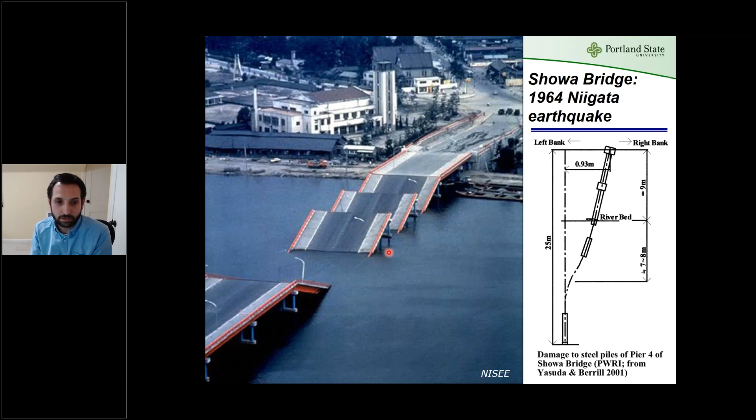To start with, there are many case histories documenting collapse of piles due to lateral spreading. You're all familiar with this example of the Showa Bridge that collapsed in the 1964 Niigata earthquake, where excessive deformations in piles due to liquefaction-induced lateral spreading resulted in the collapse of the bridge. Here's another example from the Port of Oakland that suffered a lot of damage in the 1989 Loma Prieta earthquake, with examples of shear failures at the top of the piles. There are many case histories that have documented this.

And there are cases where the piles were actually designed to sustain those loads. This is one example documented by Professor Finn from the 1983 earthquake in Japan, where the approach embankment failed due to lateral spreading induced by liquefaction, but the piles themselves did not fail, and they were designed to take the loads based on the inertial load from the earthquake shaking and the lateral spreading loads from ground deformations separately.

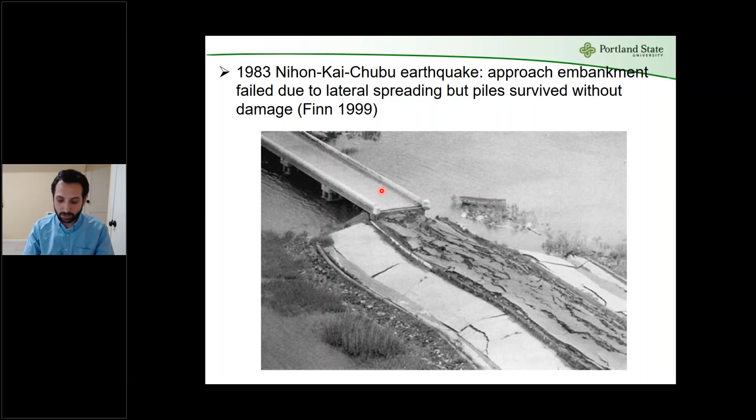Which takes us to the question we are trying to address in this study: should inertial load and the lateral ground deformations be additive in design? Are they in phase or out of phase?

You're all familiar with this drawing from Brandenberg et al., where you have piles going through what we call a multi-layer liquefiable soil, a non-liquefiable crust sitting on liquefiable soil, and at the bottom a competent soil that does not liquefy. So when it's sitting on a gently sloped ground, that top non-liquefiable crust slides down and exerts a huge load on the piles. So the load from the lateral spreading is in this case downslope, and the inertial load from the mass and acceleration on the deck mass is also downslope.

So we want to see, using these 5 centrifuge tests that I mentioned, if that is the same response we observe in those tests. Are these two loads in phase or are they out of phase? The other thing we want to discuss is how to design for them.

A lot of you know we've experienced this type of analysis, where sometimes you apply the lateral spreading demands as a displacement to the end node of PY springs. LPILE has made it very easy - you just apply it as a soil displacement. Sometimes you apply it as a limit earth pressure. So we want to see if that is applicable in our case, and you'll see in the tests we analyzed, this ended up being overly conservative, and I'll show you why in a few slides.

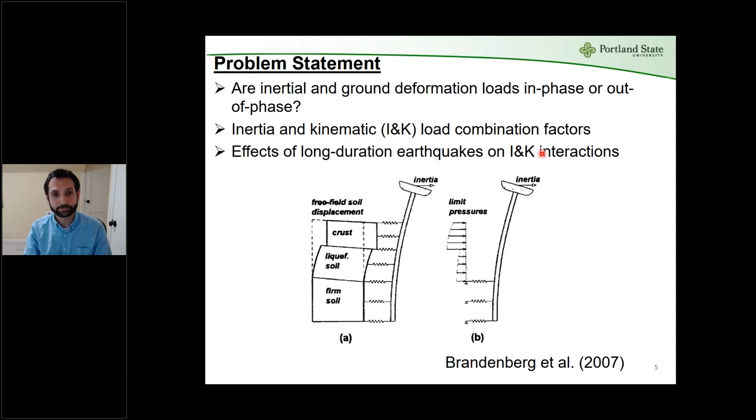I've listed here some of the design codes we were able to compile, specifically on the combination factors for inertia and kinematic loads. There are tons of research studies that have investigated this, which I'm not listing here. I'm only listing the design codes and standards to see what they say on liquefaction and on inertia and kinematic interactions.

ASCE 61-14, the code for ports and wharves, and the Port of Long Beach Wharf Design Criteria 2015 study, mention that the two loads, inertia and kinematic, do not need to be superimposed. They say the maximum moments occur at different times and the two loads should be treated uncoupled for marginal wharves. The Port of Anchorage seismic design manual recommends combining peak inertia with 100% of peak kinematic.

They allow using smaller factors if you use 2D nonlinear dynamic analysis, but no less than 25%. AASHTO 2014 still treats the two loads as uncoupled, and only says that the simultaneous effect of inertia and lateral spreading loads should be considered only for large magnitude earthquakes, for a reason we all know: longer durations. The MCEER ATC 2003 study is one of the earlier studies that really addressed this issue.

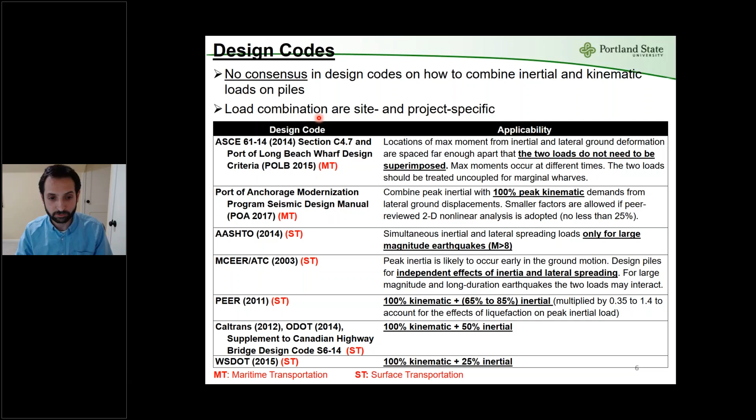We used 5 centrifuge tests performed by Scott Schlechter, Nathan McCullough, and Steve Dickenson when they were at Oregon State University. The tests were performed at the centrifuge facility at UC Davis. Here is a figure of one of these tests. Right here you see the deck supported by 3 by 7 rows of piles.

Here is a cross section of one of these centrifuge tests, which were instrumented with strain gauges along the piles, accelerometers at the wharf deck which we use to see when the maximum inertia occurs, displacement transducers that measure displacement on the deck and soil, and pore water pressure transducers that tell us when liquefaction occurs, as well as accelerometers embedded in soil, which we use to back-calculate the soil displacements.

To give you an idea of the general geometry: we have dense sand on top, two rock fills, a dense sand layer on top, about 16 meters of liquefiable soil, and underneath another dense sand layer. There are 7 piles, and as you can see in this photo, arranged in 3 rows. The pile diameters range from 0.4 to 0.6 meters.

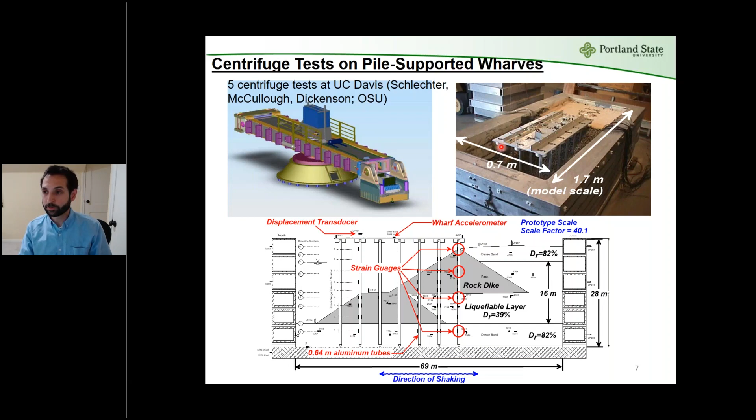So these are layouts of the other centrifuge tests. They all have a 3 by 7 pile group, with diameters of 0.4 to 0.6 meters, designed to be representative of concrete piles in prototype scale.

This is one of the tests I showed you earlier. There are 3 tests that are kind of similar: NJM01, this one NJM02, and this one to the right, SMS01. They all have a rockfill, 2 rockfills, with loose sand in the middle.

In some of these tests, an effect of ground improvement was investigated. In this middle left figure, you see a bay mud. This was supposed to investigate the subsurface conditions at the port of Oakland. Then in the SMS01 middle right, there is a CDSM, a cement deep soil mixing, used as an improvement for bay mud. Interestingly, this CDSM unit was not keyed into the underlying dense sand layer, and a failure surface developed right underneath this CDSM unit, which resulted in huge bending moments on these piles.

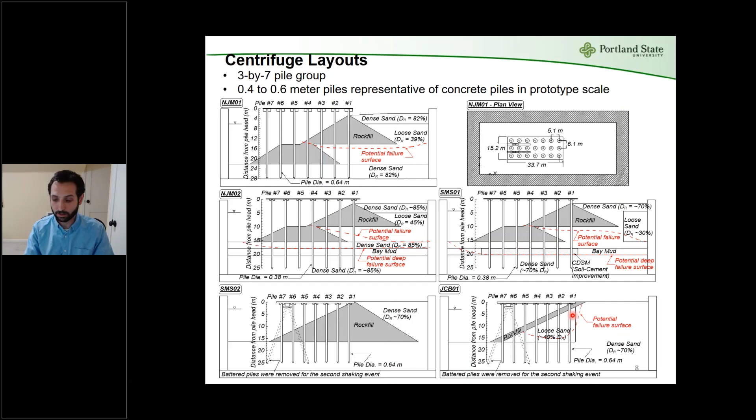Here I have an animation that shows one of these centrifuge tests, and this is not a simulation—these are all recorded data from the centrifuge test. At the bottom you see the ground motion.

This is Loma Prieta scaled to 0.15 G. You see the deck displacement moving, so that's the acceleration of the deck multiplied by the mass of the deck, which is the source of the inertial load.

You see these pink lines showing how the soil displacement is moving, back calculated from the accelerometers embedded here. You can visually see how the soil moves and the deck moves, and how they interact, whether they are in phase or out of phase during the motion.

On the right side, you see the pore pressure ratios, and right here is 100%. So right in this loose sand layer, we will see that it liquefied. Closer to the piles, it didn't really reach 100% pore pressure ratio, which I'll show you a little later.

I'm going to go to the next slide, but if you want at the end of the presentation, I can play this animation one more time.

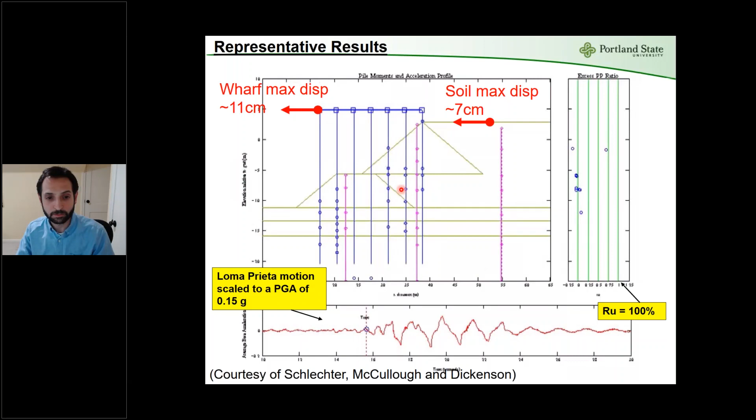Let me see if I can get that pointer. I'm trying to get the pointer to work.

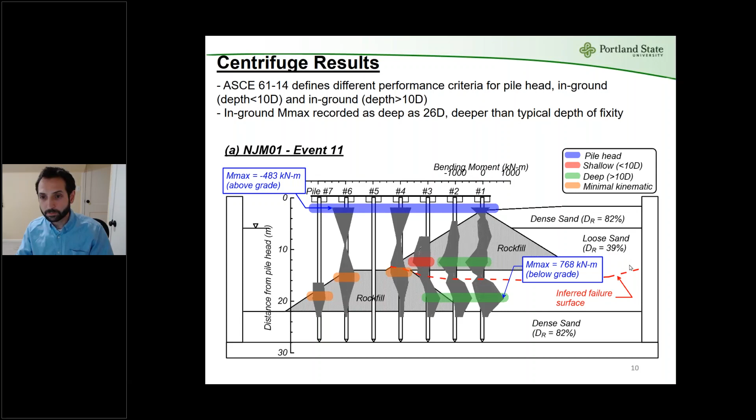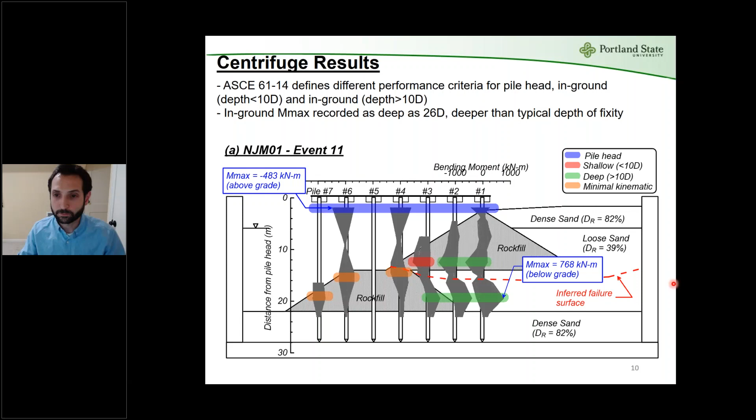So there are bending moments, shown with that blue hatched area, that develop at top of the piles. Then there are bending moments that developed deep in the soil, as deep as 26 diameters deep, which is way deeper than the typical depth of fixity. And there are places where the moment developed below grade but shallow.

So we bin these into the pile head moments, the deep moments deeper than 10 diameters, and shallow moments shallower than 10 diameter depth. This is basically compatible with what ASCE 61 uses to define different performance criteria for pile head moments, in-ground moments shallower than 10 diameter, and in-ground moments deeper than 10 diameter.

As you look at this example here, you see that the moment at top of the pile was 483 kilonewton meters. At depth, it was 768. So this is one example where the moments deep into the ground, which usually developed at the top and bottom of that liquefiable layer, were actually larger than the moments that developed at top of the pile.

So we tried to do this for all 5 centrifuge tests and understand where the moments develop—are they usually larger at top of the pile and smaller in-ground, or vice versa?

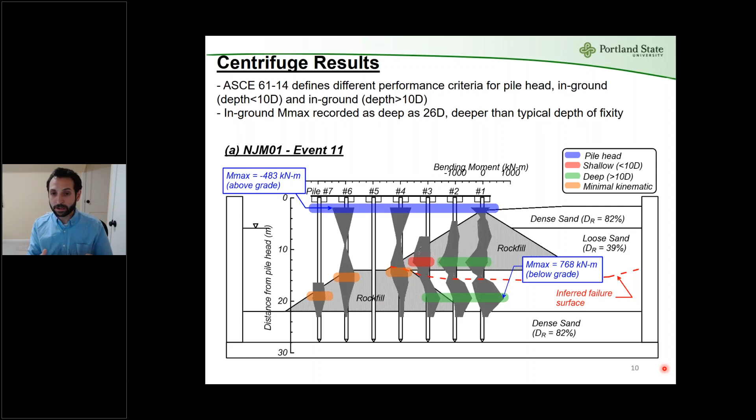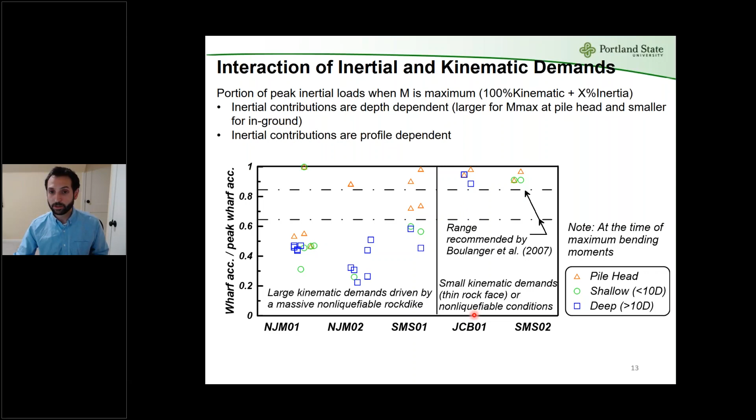So we looked at these two and tried to bin them into two classes of profiles. In one, we have a large kinematic demand driven by a massive non-liquefiable rockdike. In another, you have small kinematic demands induced by a thin rock face or a non-liquefied condition. In these cases, your combination factors are higher. Based on this analysis, these are our proposed load combination factors.

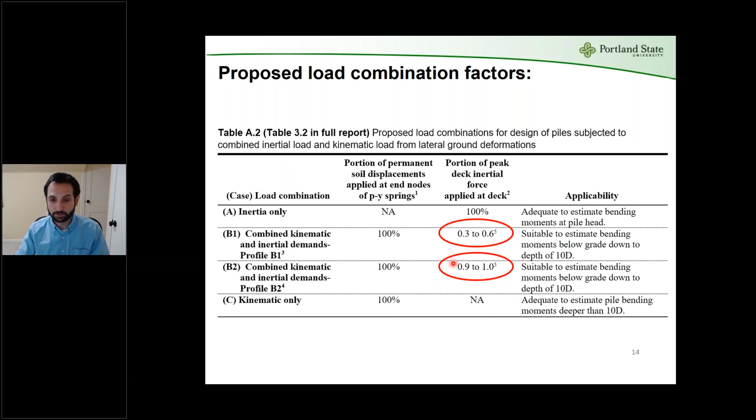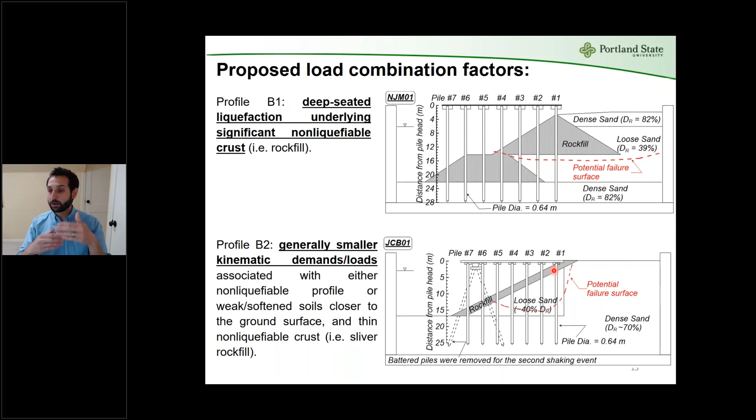Profile B2 is when you have generally smaller kinematic demands or loads associated with either a non-liquefiable profile or weak or softened soil closer to the ground surface, basically a loose sand layer and a thin rock fill. In these cases, the kinematic loads are smaller, but the contribution of inertia and kinematic is larger.

So with that, we said, how do we do the design in an equivalent static analysis using a PY approach? In order to do that analysis, we need to estimate inertial demand and kinematic demand. But before doing that, we wanted to see how accurate a PY approach is in estimating demands, specifically bending moments in the piles. And we all know the limitations with the PY approach.

The PY springs do not capture the dynamic behavior of soil structure interaction. There are issues with the way that they model loading and unloading, and the development of the gap. There are issues with the way the original PY springs have been developed for small diameter piles, so can we apply them to large diameters or not? That's also a question.

I want to show you an example of where we wanted to see what our baseline is for estimating the bending moments using a PY approach. In this case, we used LPILE. We got the deck accelerations from the centrifuge and the soil displacements from the centrifuge, and we applied them in LPILE, so there's no uncertainty associated with how to estimate these two demands.

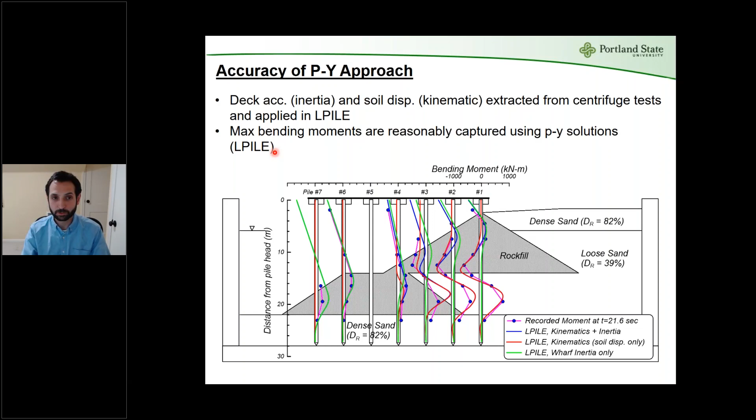So now we're going to discuss how to get these two main components, the kinematic demand and the inertia demand. There are several design questions that I'm going to go through as I discuss this section.

First of all, how do we apply kinematic demands? Displacement based versus limit soil pressure. This is the same figure that I showed you earlier. One approach is when you get the soil displacement and apply them to the end node of PY springs, and then look at the demands in the piles. The second approach is to remove all the PY springs and apply a limit or ultimate soil pressure on the piles and estimate the demands.

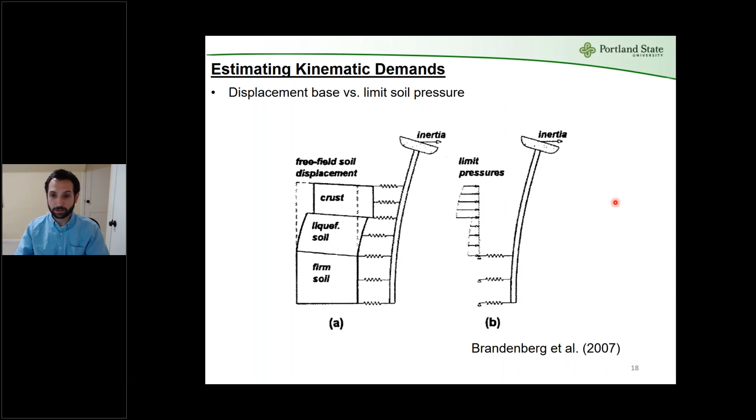We found that this ends up being overly conservative in our case, and I'll show you why. These are the soil reactions back calculated from one of the centrifuge tests in two events, so the results are fairly consistent. At the time when inertia is pushing downslope, inertia is pushing to the left, but when you look at the soil resistance or soil reaction, it's actually resisting in almost the top half of the rockfill.

And it's pushing down in the lower half of the rockfill. So it's nowhere near a uniformly downslope earth pressure or soil pressure that you would use with the limit soil approach. If you apply a uniformly downslope soil pressure instead, you're going to overestimate demands by a huge amount.

This is a case when you have small diameter flexible piles, because flexible piles tend to follow soil deformations. This conclusion may not be the case when you're dealing with large diameter piles, and we can get into that if needed.

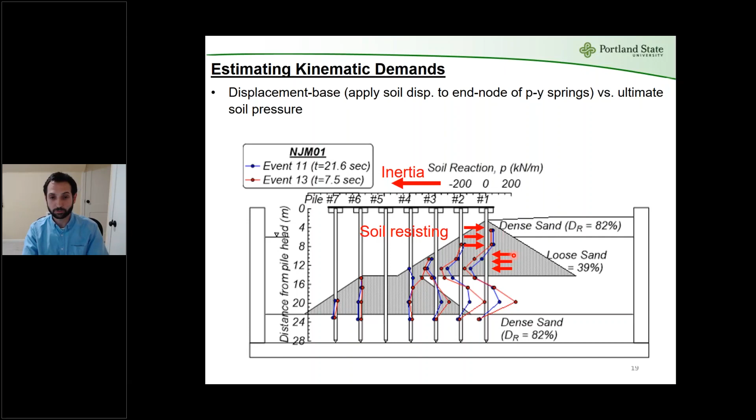Here I'm showing you why that soil reaction is the way I showed you earlier. On the left, these are back calculated soil displacements and pile displacements from centrifuge tests, so they're not simulation or L-pile analysis, they're back calculated from the tests themselves. Red shows how the soil moves, blue shows how the pile moves, and as you see there are locations where the pile moves more than the soil, which is why the soil reaction pushes up in a positive direction, and there are areas where the soil moves more than the pile, which is why the soil reaction is moving downslope in the negative direction.

Now here I have this red line which shows the ultimate soil reaction. If you take the P ultimates of the PY springs from API and plot it here, you can see that the soil reactions we back calculated from the centrifuge are just way smaller than the P ultimates you would estimate from PY curves, from API curves.

This figure to the right is the same figure with just different scales, so you can see the P ultimate from the API curves if you choose to use the ultimate soil pressure and apply it as a kinematic force. You would overestimate the demands by a significant amount if you use the red curve as opposed to the displacement approach, which might give you something closer to the blue demands.

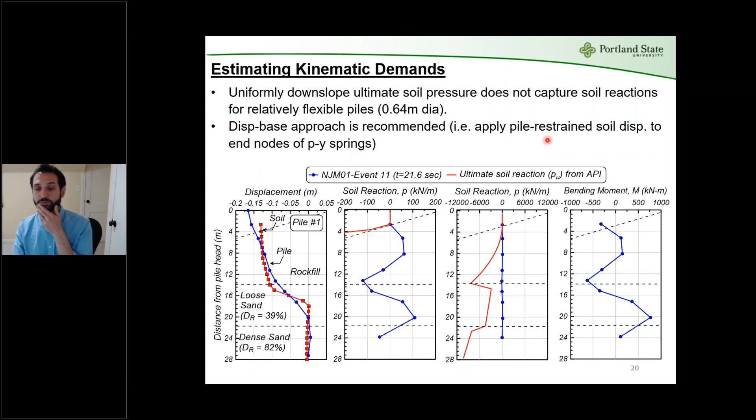So the second question, going back, our recommendation is to use a displacement-based approach and apply the pile restrained soil displacement to the end node of PY springs. Now let's focus on that pile restrained issue. Some people believe we should apply the free field displacements to the end node of PY springs. Some people believe we should apply the pile restrained soil displacements, accounting for pile pinning effects. Caltrans 2012 recommends using the pile restrained displacements, and I wanted to show you what happens if you use either of these two displacements.

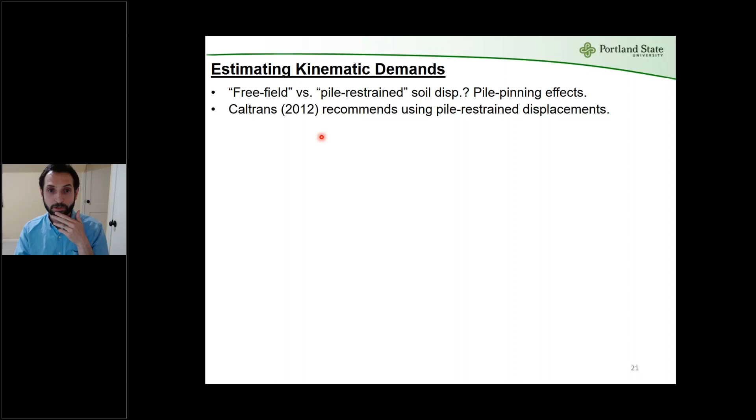I'm showing you a different project, different study, from when I worked at Fugro, just as an example to see what happens if you use either of these two loads. This is from an Amber Cove cruise ship docking facility in Dominican Republic. There's a 400 meter main pier supported on 30 bents, and a trestle here 200 meter long, supported on 17 bents. And the bents look like this, a pile group with 3 piles.

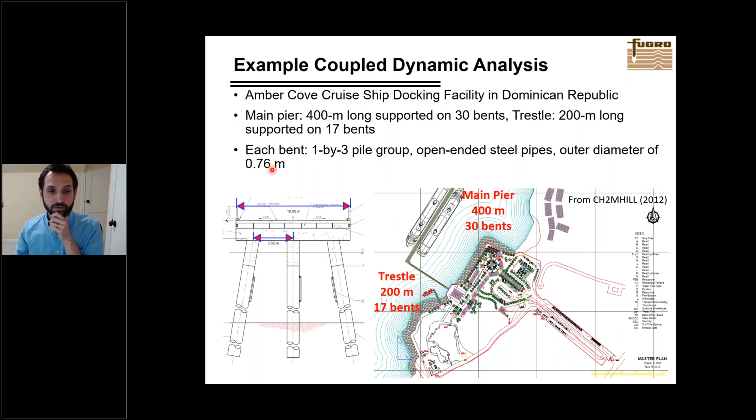Again, relatively flexible piles, 0.76 meter diameter. We performed FLAC analysis, nonlinear dynamic analysis. On top, you see soil displacements without the piles, 3.5 meters of soil slope toe displacement. At the bottom, you see the results if we add the piles, what Caltrans calls pile restrained displacements, about 0.4 meters. So 3.5 meter soil displacement free field compared to 0.4 meter pile restrained displacement.

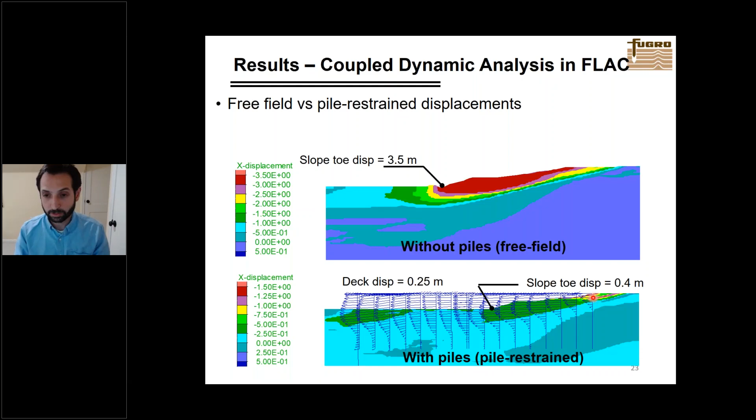Now let's see what happens if you apply them in L-pile. On the left, this is the result of a pseudostatic analysis, where you take those soil displacements and apply them in L-pile. You see the soil displacements in dashed blue line, that's the 3.5 meters I showed earlier. The pile displacements you'd estimate from that are really large, whereas in the dynamic analysis we recorded much less, less than 0.5 meter displacement at the top of the pile.

Now, if instead of free field displacements we apply the pile restrained displacements, you get something much closer to what you measure in the dynamic analysis. Red is the displacement estimated using pile restrained displacements, accounting for pile pinning effect, applied in L-pile. That gives you one point of reference, and I'm sure many of you are familiar with this difference, that free field displacements versus pile restrained displacements could be huge.

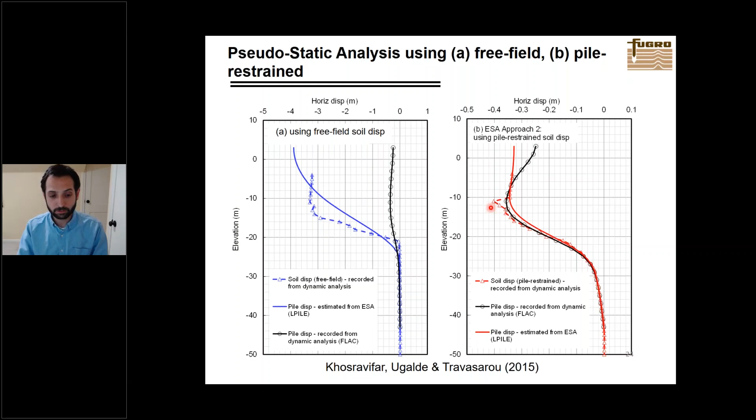The other design question, going back again, our recommendation, as you'll see later, is to use the pile restrained displacements. Now, if you're trying to estimate the displacements, how do we estimate them? We usually use Newmark block analysis. We wanted to see what displacements these Newmark block analyses really represent.

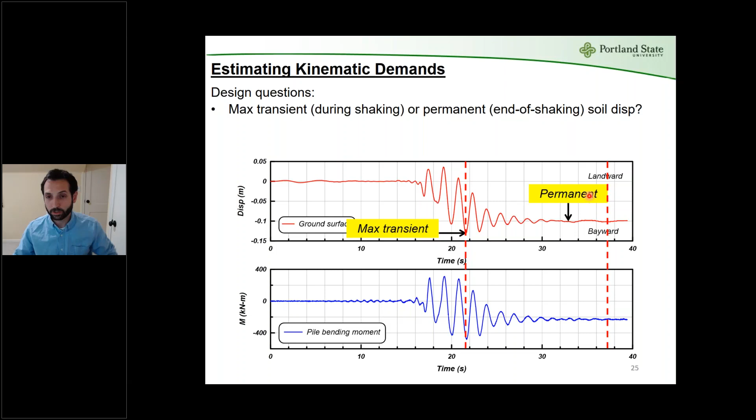For relatively flexible piles, this is very important because the bending moments are almost linearly, maybe not linearly, but very strongly proportional to the soil displacements, since they follow the soil displacement pattern. So we wanted to see, when we perform a Newmark block analysis, do we estimate this transient one or the permanent one, and by what measure of accuracy?

Here you see results from one of our master students, Thomas Torkelson, using Newmark sliding block analysis to get the pile restrained soil displacements. Caltrans recommends using the compatibility approach, where you actually perform pile pinning and get the shear forces from a lateral load analysis, in this case LPILE, and input them into your slope stability analysis, or SLOPE/W analysis. That's what we did here. If you're curious, we used residual shear strengths in liquefiable soils, compatible with the weighted approach that Steve Kramer recommends in his 2008 WSDOT report, and they worked out pretty well in estimating displacements.

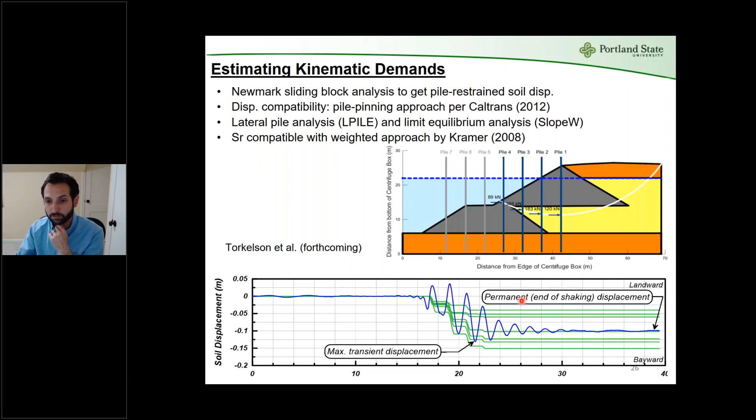In this figure at the bottom, you see the soil displacements with time. Blue is the recorded displacement from the centrifuge, and green is what we estimate using Newmark block analysis. You see there's quite a bit of variation here. So we looked at the mean or median displacements from Newmark, and median plus one standard deviation, and tried to see which one better estimates the maximum transient or permanent soil displacements.

What you see here are results from all 5 centrifuge tests and 2 shakings per test, so 10 experiments total, comparing Newmark displacements versus centrifuge displacements. On the left is the permanent end-of-shaking displacement. On the right is the maximum transient displacement. As you can see, if you're interested in permanent end-of-shaking displacements, the median displacement from Newmark analysis on average captures the permanent displacement from the centrifuge reasonably well. If you're interested in maximum transient displacement, then we have to use median plus one standard deviation, shown by these tick marks, the ranges you see in these plots.

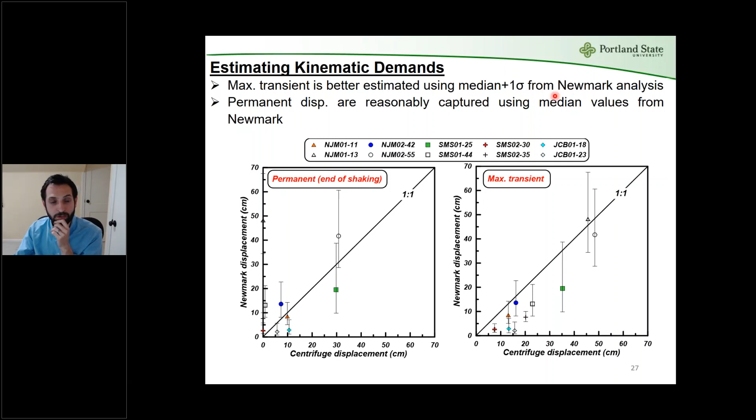Maximum transient displacement is better estimated using median plus 1 standard deviation from Newmark analysis. Permanent displacements are reasonably captured using median values from Newmark. But there's a caveat here.

If you're interested in maximum moments, we should be using maximum transient displacements. If you're interested in maximum transient displacements, our data shows that we should be using Newmark method, median plus 1 standard deviation. But when you get the soil displacement at the ground surface, you have to distribute them with depth.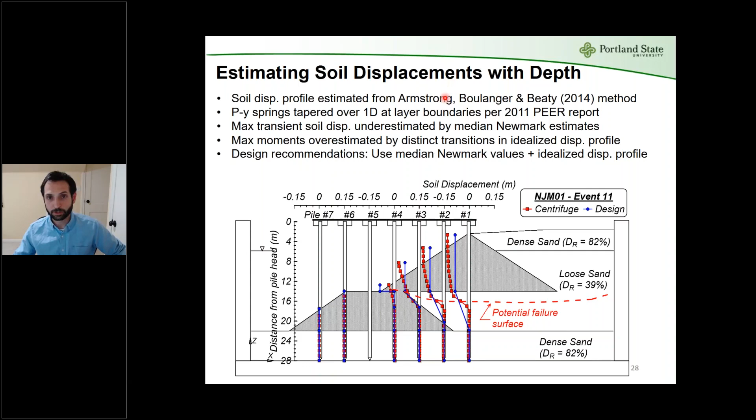By the way, to distribute the ground surface displacements from Newmark with depth, we followed the method published by Armstrong, Boulanger, and Beaty in their 2014 paper. It ended up being constant within the non-liquefiable crust, linearly decreasing within the liquefiable soil, and then constant within the dense soil, which you would probably use in design anyway. But this is specifically in this case, that was our finding. There are other cases where their approach might give a better estimate of the displacement profile.

Now that we have a way to estimate the kinematic demands, we want to see how to estimate the inertial demands. So we use pseudostatic analysis or pushover analysis. We know that liquefaction affects spectral acceleration, but these effects depend on the timing of liquefaction triggering.

Plus, there are questions whether when doing a pushover analysis, you use softened soil properties accounting for the effect of liquefaction, or use non-liquefied conditions. Caltrans recommends estimating inertial demands from non-liquefied conditions using pushover analysis done with non-liquefied soil properties, and then modifying it with the effect of liquefaction.

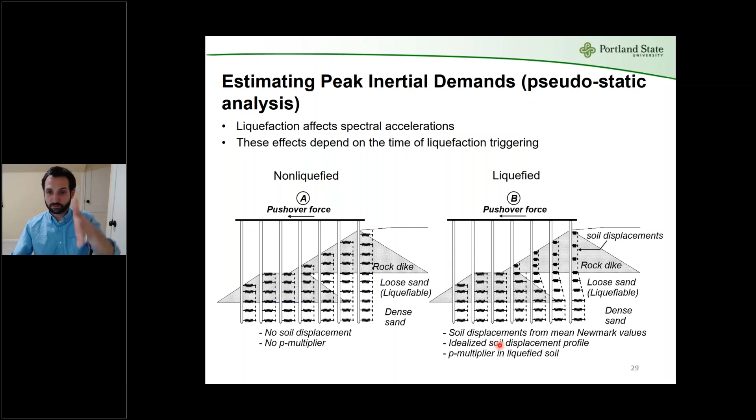We tried both. We performed our pushover analysis using non-liquefied conditions, and also performed the analysis with liquefied conditions, where we applied soil displacements to the end node of P-Y springs. Those soil displacements, following our previous recommendation, used the mean Newmark values and idealized soil profile displacements with sharp edges. We also applied P-multipliers in the liquefied soil.

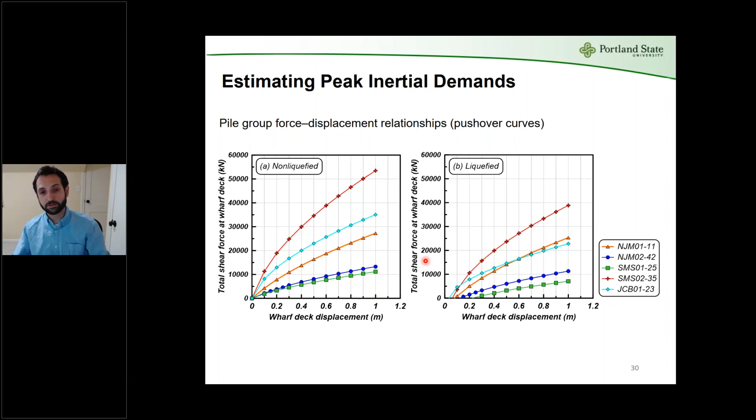These are our pushover curves in the non-liquefied condition and liquefied condition for all 5 tests. You can see that the stiffness of the curves are softened due to the effect of liquefaction and the soil displacements that are applied due to kinematic demands.

We then use the pseudostatic analysis to estimate the wharf acceleration. These 2 figures show the spectral accelerations from the equivalent static analysis from pushover analysis on the vertical axis, and the recorded peak wharf acceleration on the horizontal axis recorded from centrifuge tests. On the left, you see the non-liquefied pushover analysis. On the right, you see the liquefied pushover analysis.

Overall, we found that there is no significant difference between doing the pushover and performing a pseudostatic analysis with liquefied versus non-liquefied conditions for these tests that we analyzed. On average, they ended up estimating the wharf displacements and accelerations pretty well.

One thing to notice is that we found we have to use a higher damping ratio for the spectral accelerations to estimate a reasonable maximum wharf acceleration—something close to 15% as opposed to the typical 5% used in design. We have justifications for this using the equivalent static analysis shown here, and later we did a FLAC nonlinear dynamic analysis, and again came up with the same conclusions.

This added damping could be attributed to radiation damping and the soil-pile-fluid interaction that we don't normally capture with a 5% damping ratio, but it's something to be considered with the structural and geotechnical engineers on the project.

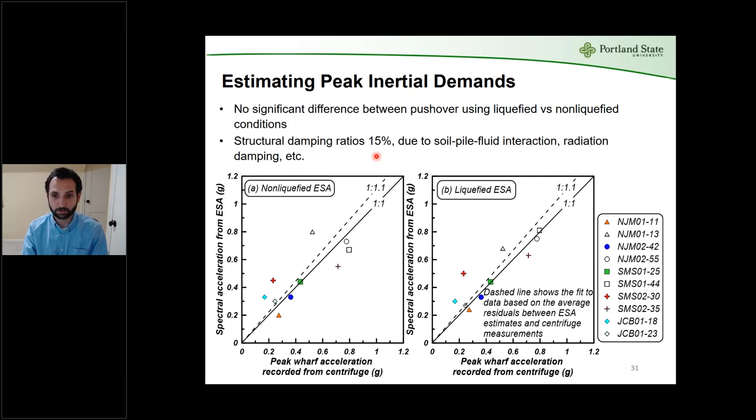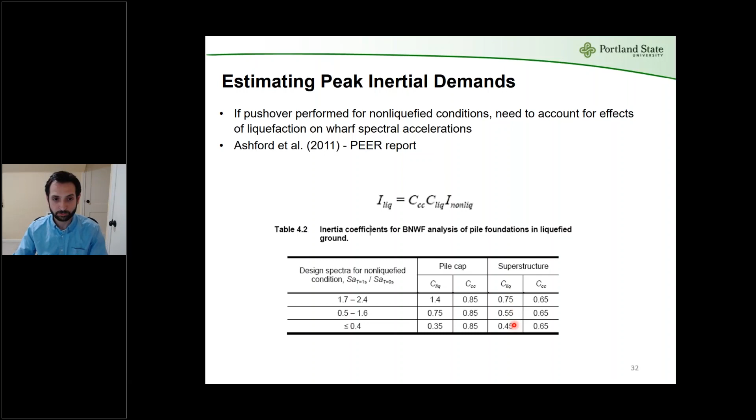One thing to note is that if you use a non-liquefied pushover analysis to estimate inertial demands, you need to account for the effect of liquefaction on the wharf spectral acceleration. Caltrans, as outlined in this PEER report, or Ashford et al. 2011, recommends that you take the I non-liq, the inertia in the non-liquefied case, and modify it with C-liq, which accounts for the effect of liquefaction. C-liq ranges from 1.4 to 0.35 for pile cap, or 0.75 to 0.45 for superstructure, for different types of ground motions with different spectral shapes.

Now that we have an estimate of our inertial demand and kinematic demand, we wanted to see how to combine them and where we actually need to combine them. So we performed our pseudostatic analysis in L-pile in three different ways.

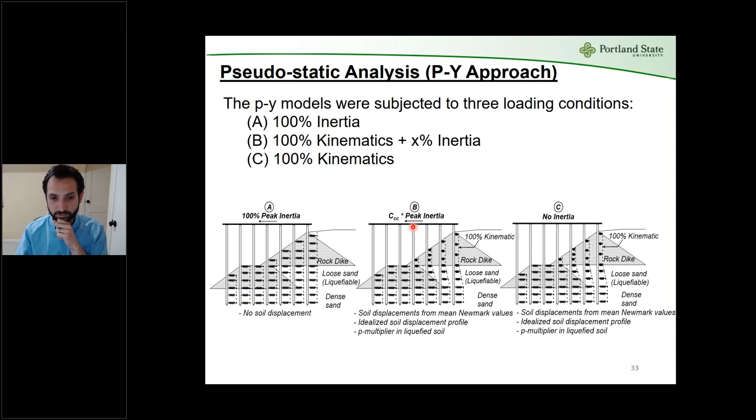Case A is when we only apply the inertia at top, 100% of inertial load. Case C is when we only apply kinematic demands and no inertia - kinematic demands being the mean Newmark displacements applied to the end node of PY Springs, combined with the idealized soil displacement profiles, and softened PY Springs within the liquefiable soil using the P-multiplier approach. Case B is a combined case, with 100% of kinematic demand plus some portion of inertia at the top of the piles at the deck.

Here's what we see. These are all bending moment comparisons - bending moments estimated from L-pile on the vertical axis, bending moments measured in centrifuge on the horizontal axis. The left figure shows the bending moments that develop at the pile head. The right figure shows the deep bending moments that develop at depth. These are the three cases.

If you look at the left figure for moments at the pile head, you'll notice that applying 100% kinematic only, as expected, underestimates demands, because bending moments at the pile head are heavily influenced by the inertial load. So without the inertial load, we underestimate them. On the other hand, if we apply 100% of inertia only, shown with the green plus symbols, we actually end up estimating the measured moments reasonably well, and on average we estimate them reasonably well.

If you look at the bending moments that develop at depth, deeper than 10 diameters, applying inertia only obviously doesn't estimate those bending moments well. But if you apply kinematic only, with no inertia, you actually get a pretty good estimate of the bending moments. Adding inertia, in this case 85%, just as an example, doesn't really increase the accuracy of those estimates. So we use this as a basis to suggest that if you're interested in pile head moments, applying inertia only is enough. If you're interested in deep moments that develop deeper than 10 diameters, applying kinematic only, the displacement-only case, is enough.

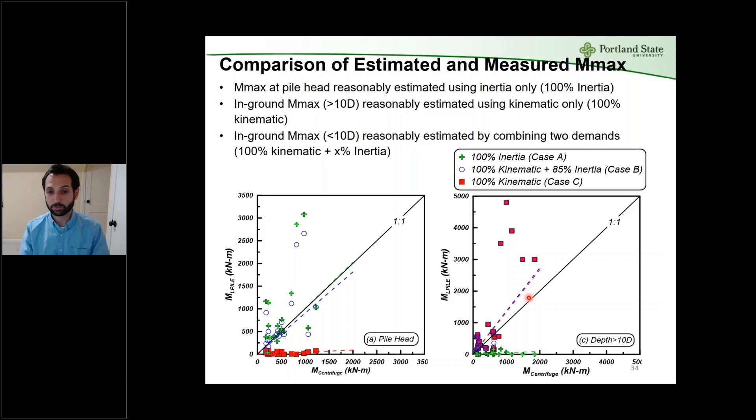The next thing I want to discuss is that now that we have some estimate of the inertia and kinematic interaction using centrifuge tests performed primarily with short duration motions, we wanted to see the effect of long duration motions on this interaction. Based on AASHTO and other codes, we'd guess that this combination is likely to be higher, but we wanted to see if that's really the case with the analysis.

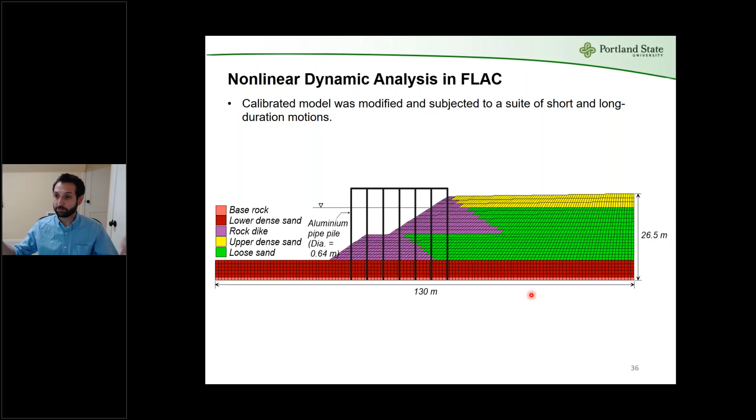So what we did is use nonlinear dynamic analysis in FLAC. We took one of those centrifuge tests, made a FLAC model, calibrated it based on the centrifuge test data, and then subjected that calibrated model to a suite of short and long duration motions that are spectrally matched to have the exact same spectra but different strong motion durations.

The constitutive model we used for liquefiable sand is PDMY03. This is the model I worked on with Professor Elgamal and his team, and we published it in 2018. Professor Elgamal and his team have implemented this model in FLAC, FLAC 3D, ANSYS, and a bunch of other different platforms, and you can check them out on their website, soilquake.net.

One thing we added to this model in PDMY03 compared to previous versions was that we modified it so that when you look at CSR versus number of uniform cycles to reach liquefaction, we were able to reduce the slope of the line, or the B value, to be more representative of the experimental data, somewhere close to 0.33, which is what you would expect for sand soils.

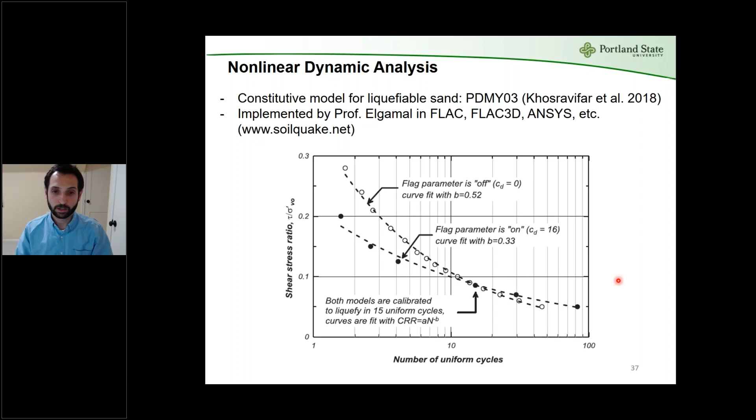Potentially for long duration motions, that could make a difference to model with a lower B value. So we calibrated against one of the centrifuge tests.

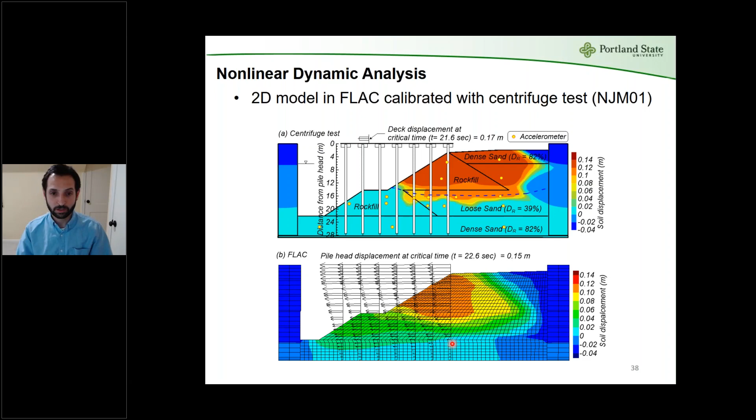We wanted to make sure that we get the soil displacements right and the deck accelerations right. Here you see a comparison of the soil displacements. Top is the centrifuge, bottom is from FLAC. We get some aspects of the behavior right, some not so good, but in terms of the key mechanisms which are important for us, the soil displacements and the deck accelerations, we're capturing it reasonably well.

Then we subjected them to a whole bunch of ground motions that are spectrally matched. These are shown on the left side. Those are the spectra of the seed motions, and we spectrally match them so that they all have the same spectra. In this case, I'm showing you the target spectra developed based on AASHTO, which is a 975-year return period, developed for a hypothetical site in Portland, Oregon.

And you can kind of see the duration of these motions. It ranges from shallow crustal motions with a duration of 4 seconds, all the way to Tohoku-type motions with a strong motion duration D5-95 of up to 85 seconds. The benefit of using these motions is that since they all have the same spectra, they induce comparable amounts of inertial effect, and the only difference would be the duration. So we can use that to see how that interaction changes.

I only have a few more slides here. This is a commentary from the Canadian Highway Bridge Design Code S6 2019. I'm quoting: in large magnitude earthquakes, there's a higher likelihood that strong ground motions will continue following liquefaction triggering. And we totally see that using these results.

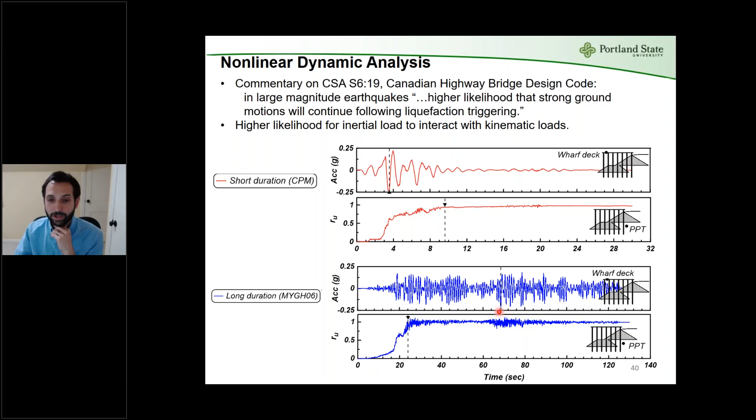Here you see the deck acceleration and RU, which tells us when liquefaction triggers. The top is the short duration motion, and the bottom is the long duration motion. This is where liquefaction triggers, indicated by 100% RU. You can see that after that, in a short duration motion, we barely get any inertial cycle. Whereas in the long duration motion, liquefaction triggers here around 24 seconds, and after that we still get a lot of strong inertial cycles. In fact, the maximum inertia occurs somewhere closer to 70 seconds, way after triggering liquefaction.

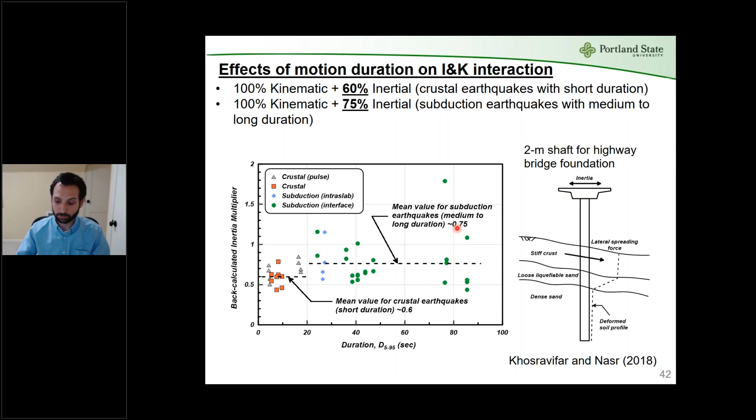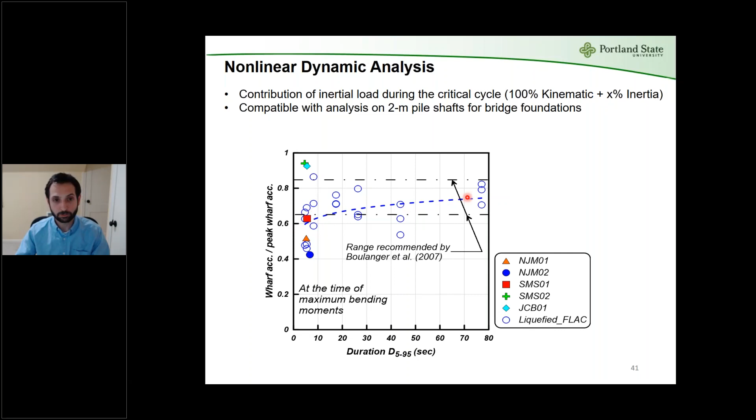If you look at the load combination factors, inertial combination factor on the vertical axis versus duration, we also see the same increasing pattern with duration, which is just another way to say that when dealing with long duration subduction earthquakes, there is a higher likelihood for inertia and kinematic effects to interact. We calculated that for short duration earthquakes, with or without pulse, we get about 60% inertia contribution, and that increased to about 75% for long duration earthquakes—roughly a 15% increase. Going back to the previous slide, we notice the same thing: going from about 60% in short duration ones to close to 75% in long duration ones.

Something to add here is the difference specific to flexible piles. In relatively flexible piles, when we have small diameters, closely grouped piles, such as what we typically see for wharves and ports, kinematic demands dominate the response in long duration subduction motion.

So here you see FLAC analysis for 3 different cases. Case A is our typical case when we have liquefaction and deck mass, and we get the combination of the two effects. Case B is when we only have the deck inertia, so we turned off liquefaction and make the soil behave as drained, giving very little kinematic effect and only inertia. Case C is kinematic only, where we set the deck mass to zero but still get liquefaction and liquefaction-induced lateral ground deformations.

When you compare the short duration motion on top versus the long duration motion at the bottom, you see that in a short duration motion we get quite a bit of contribution from inertial force. Whereas in the long duration, the red, which is kinematic only, pretty much dominates the pile or wharf response. So even though you get small cycles of inertia, most of the wharf displacements are governed by that kinematic effect. Even though in long duration subduction motions we get larger inertia contributions, the inertia interaction factor's contribution reduces and becomes less important, and kinematic really becomes the driving force and dominates the response.

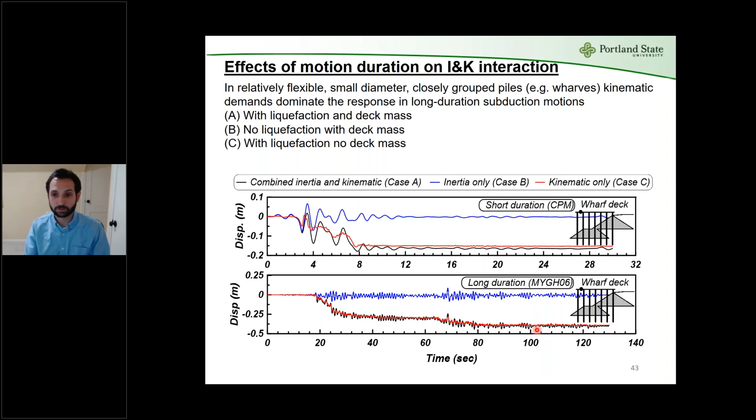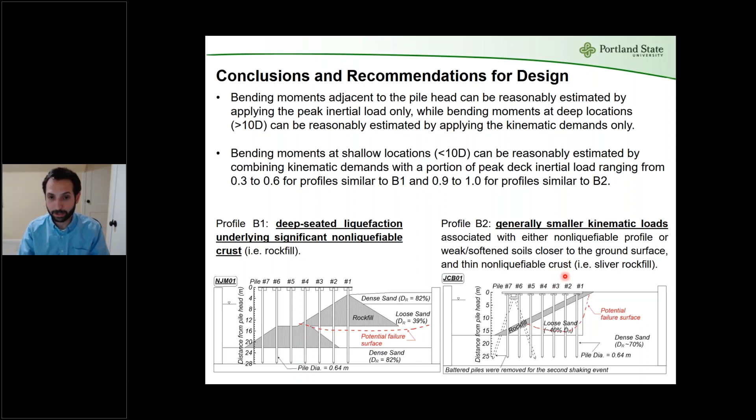And just as a reminder, these are the two profiles. Profile B1 is when you have deep-seated liquefaction underlying a thick non-liquefiable crust. Profile B2 is when you have shallow liquefaction with a relatively thin rock fill or riprap, or just non-liquefied conditions. The wide range of this inertial multiplier observed in this research highlights the benefit of performing coupled nonlinear dynamic analysis.

So if this combination factor is really driving your foundation concepts and demands, it might be worth it to perform a nonlinear dynamic analysis to really capture this complex soil-structure-pile interaction for the exact site-specific soil profile that you have at your site.

These load combination factors that are proposed here are only appropriate for decoupled analysis when you're using a p-y spring approach. They are not necessarily appropriate for cases using a simplified equivalent fluid pressure or a limit pressure approach, because there's a built-in conservatism using the fluid pressure or limit pressure approach.

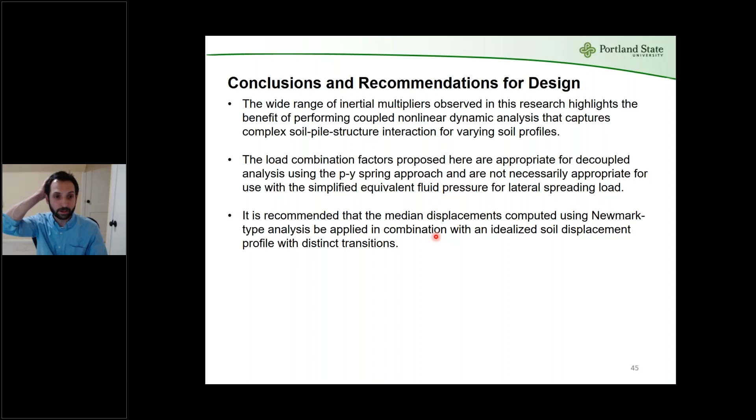It is recommended that the median displacements computed using Newmark type analysis be applied in combination with the idealized soil profiles with distinct transitions. The analysis in this study suggests the likelihood of inertial load interacting with kinematic loads increases with motion duration. We noticed about a 15% increase going from short duration to long duration motions.

However, it was found that the behavior of wharf structures supported on relatively flexible small diameter piles, which follow the ground deformations very closely, is heavily influenced by kinematic loads in long duration motions and less so by inertial loads.

And the last thing, on damping ratio: the modeling performed in this investigation supports the use of a damping ratio significantly greater than the 5% routinely used in practice as a basis for spectral accelerations. Given the range of tolerable and anticipated displacements defined in ports codes and standards for design level ground motions, a damping ratio of approximately 10 to 15% appears more suitably representative of the aspects of wharf and pile foundation and soil behavior.